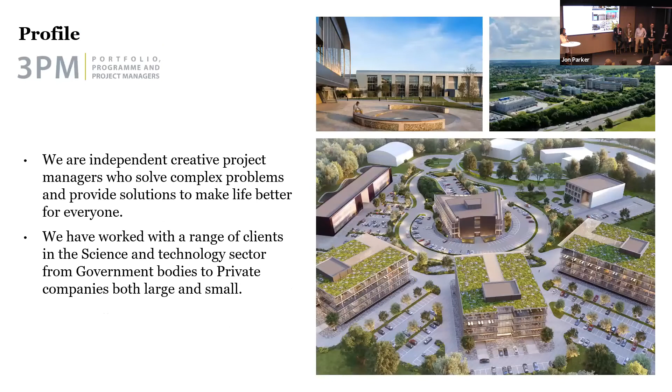Ramboll are 16,000 people across the globe, covering all sectors, but they have specialisms in the UK in science and commercial spaces, and are the go-to structural, vibration and acoustic engineers in this sector. An example of where the research paper's findings are being put into effect is Cambridge Biomedical Campus and Granta Park with Biomed Realty, who we're fortunate to hear from later.

How am I doing with your companies? Turner & Townsend are 75 years old this year and deliver a variety of services across the breadth of the real estate sector. They are leaders in the science sector, having delivered major projects such as the Francis Crick Institute in London, and have a deep understanding of the science sector built up over many years.

Good. Right, I'm going to hand over to Rob to talk about our research paper. Thank you, Susanna. I have some notes here, so forgive me. Just let me check I get the message across properly.

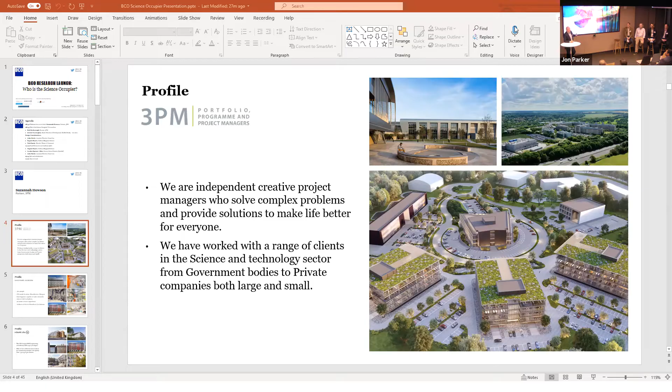So, introduction. I'm going to do the scene setting for today, and the guys who are the experts are going to talk about the specific disciplines that they relate to.

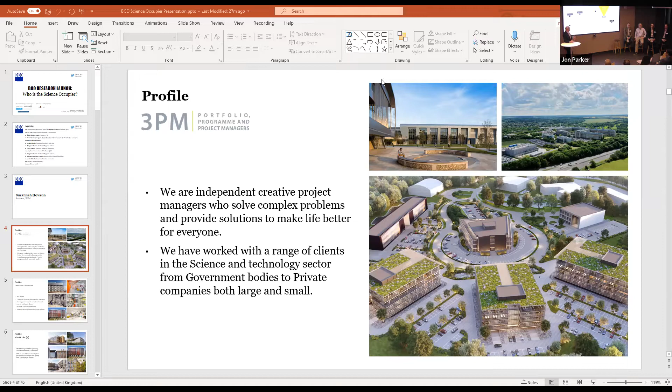But we are ideally placed because of the knowledge that transfers across from the US. There are more biotechs and startups in San Francisco, Cambridge Massachusetts, and Boston, and all the way down the East Coast. A lot of that learning is coming across into the UK, and how they launch their companies on the NASDAQ, and how investment is attracted, and how they understand the companies we are trying to attract as developers, investors, and for occupiers.

And then obviously, because the UK is centred around the Greenwich Meridian, it's perfect for time zones as well, to reach both east and west. So it ticks a number of boxes for the global science community.

So it's important that we have these hubs for scaling great ideas, nurturing top talent, and building a dense pool of expertise that's sustainable. And that all leads to building a community that's perfect for occupiers in the UK.

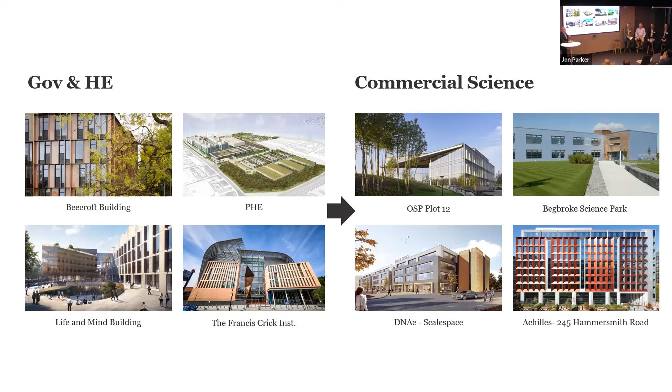Where we're now going is bespoke commercial science. Places like Oxford Science Park, Begbroke, Achilles Arena, 245 Hammersmith, some great buildings there, and those are symptomatic of what we'll all be working on going forward. So we have some great talent, and that's kind of where we're heading.

Yeah, we're going to do a double act. Yeah.

So we're just going to talk a bit about design considerations and things that the tenants may require, and how it could fit into any existing building or new building.

So I think first of all, it's probably good to take a step back and just look at what the specification level that the tenant would require could be. There are three main drivers really that could influence this.

First of all, the typology of science. Rob articulated there are many different typologies, medtech, cell and gene therapy, etc. They all have different needs, and depending on the location, where they are in the city. For example, if you're in a city centre, it's more likely to be an incubator next to a higher education facility that they lean on.

And then also we need to look at what the maturity of said occupier would be. So if you're a spin-out, you're likely to be looking at higher specification of the laboratory in terms of the fit-out, so you'd have almost a fully functioning lab at day one. And then if you're more of a scale-up, so you've secured additional funding, that would lend itself more to a shell and core kind of approach to fit-out, because they're much more bespoke in their requirements.

So that's really picking up on what Orestes was saying in the video, in case you didn't catch it, is that the drivers for innovation, the collaboration between organisations, is absolutely critical. So building that into your property is really important.

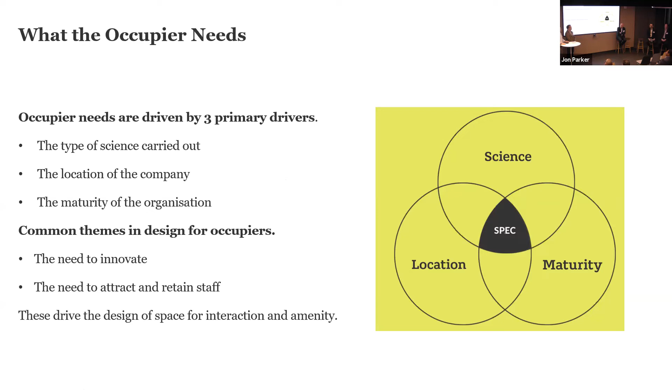And then generally, there's a whole range of different types of science. We won't list them, but obviously there's going to be office write-up, lighter CL2 wet lab, biology typically, so not too many fume cupboards or MSCs. And then you've got a higher level which would be more chemistry-based tenants or occupiers where you have higher intensity, maybe higher air change rates and higher density of equipment. And then at the end there's advanced manufacturing, which is further along the spectrum of their development.

In the first slide, we picked up on some of the key themes that we're meeting in designing buildings for science users. And another, apart from interaction and the drive for innovation, another common theme is flexibility and adaptability. I think it's almost ubiquitous.

If you're talking about science buildings, people talk about how you're going to flex the building. And there are three drivers that we've picked out on the slide. But the reality is that the companies we're providing for—Rob and Jon have both talked about spin out and scale up.

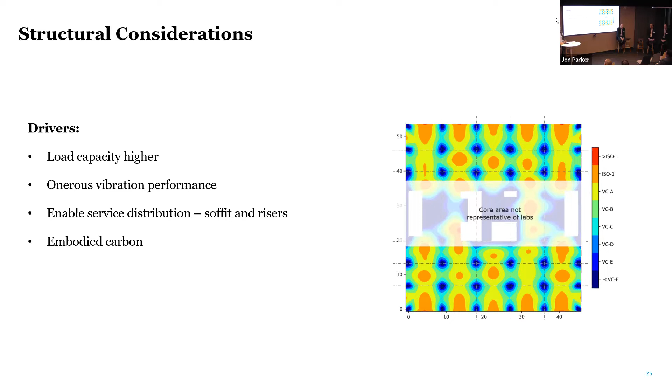So as a follow-up from that, having talked about the structural frame and the space planning grid, the other conversation we often have at the beginning of design for a science building is what's the right floor to floor height, and the driver for that is usually the M&E, because they want to distribute air across the ceiling, what was the ceiling void, or is the ceiling void.

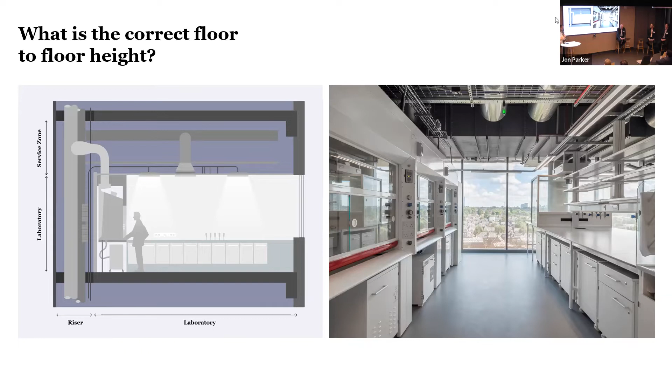Next slide. So having talked about air, I'm going to pass to Jon.

Thanks, Eugene. So as part of the M&E, there are additional air change rates required within labs in comparison to offices. This is an example of 245 Hammersmith Road, where designed as an office, BCO office, laboratory went into the space. In order to make the labs work, we actually placed on-floor air handling units within the floor plate, and this negated any need for air handling units to go on the roof where space was at a premium.

What it meant as well was that the occupier had full autonomy over their plant, so they didn't have to traipse up to the roof, and actually it worked quite well. We had to add additional louvers to get the additional air onto the facade, but yeah, it's quite a simple solution to meeting the needs of the occupier.

If you're talking about a new build, then the additional air change rates would obviously be built into the air handling units and distribution ductwork. It's worth just saying that for a laboratory, typically you're talking about 6 air changes an hour as a minimum, and that obviously can grow compared to how many for an office.

Well, I think in commercial science we're trying to challenge the norm. Traditionally, I think HE and government air change rates were quite high compared to what they are now. So to get that real efficiency and value for money for our landlords and occupiers, by driving that down, it also helps with the operational carbon as well. So we're looking at more 3 to 6, depending on the typology of science.

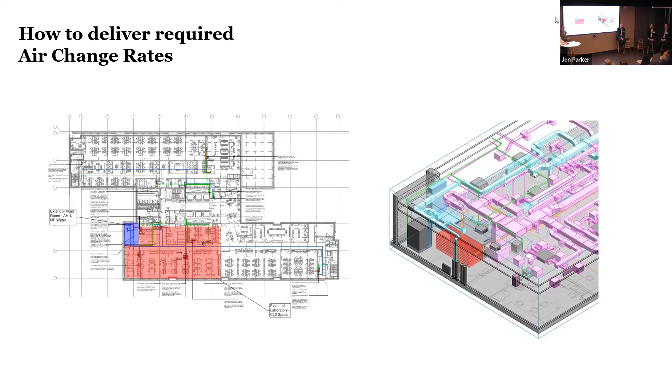For example, at 245 Hammersmith Road, it would have been very challenging given the environment and the turbulent airflow around that Hammersmith roundabout to actually put a flue up there. So we got to grips with the users, got a list of chemicals, and looked at whether we could put in recirculating fume cupboards, which negate the need for any flues, and we proved that it could work, and as such it was a much simpler installation, didn't have to go through planning, etc. So although flues can look scary, there are ways around it, basically.

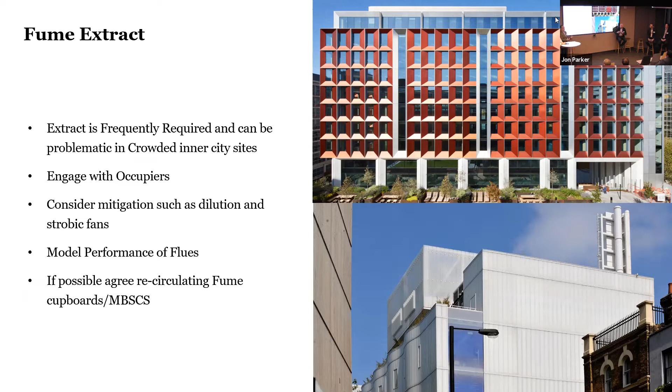We're trying to make things simple, I think, is the message here. Then there's obviously a requirement in labs for back of house, so handling of consumables, solids and solvents and acids, gases and cryogenics, cryogenics being liquid nitrogen typically used for cell storage on the floor. I don't want to go into too much detail, but liquid nitrogen, if you're transporting it around the building, you need certain health and safety requirements.

There are ways around that as well, by potentially using liquid nitrogen generators, which negate the need for as extensive health and safety requirements. So again, it's a challenge, but it's absolutely not unovercomable. It's one of the key differentiators between a science occupier and a non-science occupier: you do have to provide these spaces, and you have to envisage how they might flex and change as your occupier profile changes.

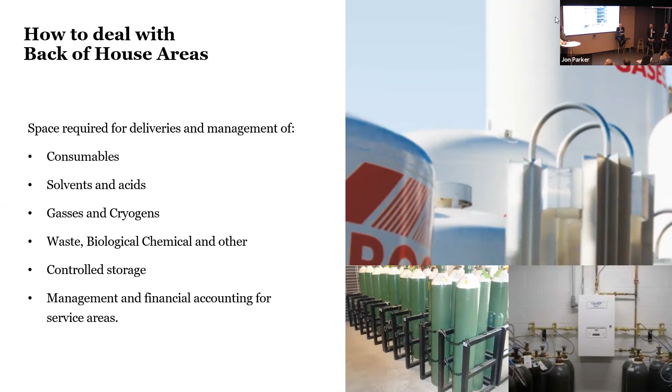So another key aspect is what the landlord-occupier split should be, and this is right for fit out or new build. As we alluded to earlier, the maturity of the tenant could dictate what your day one specification of the laboratory would be. This depicts more of a scale-up, more mature tenant where you'd probably, in theory, go with more of a shell and core type approach because they've got more specific requirements in the lab and probably the funding as well.

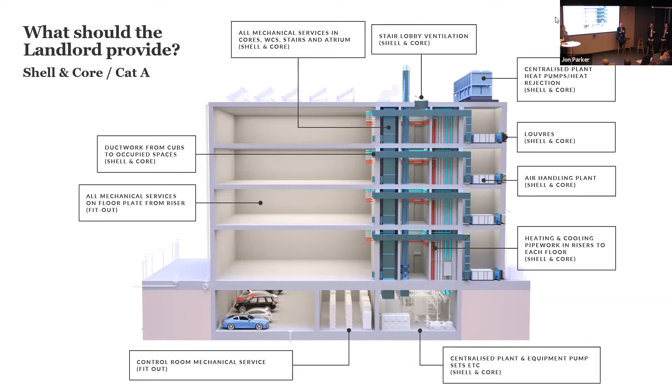That they can do the fit out themselves, rather than if you're an incubator spin-out type occupier, you'd require something a bit more fitted out, oven ready, so that you can go in and start exacting your science. It's worth saying we've already written Cat A at the top, and thanks to the BCO, those concepts are kind of well understood. In the laboratory world, that doesn't really exist, so it's still something that's negotiated very much on an individual basis, something that needs to be considered and discussed.

In terms of net zero carbon sustainability, it's increasingly and extremely important for both occupiers and their funders, with particular requirements. Laboratories are much more energy intensive, and there are health and safety considerations in terms of air change rates, etc.

But what we would say is there's huge opportunity here to make big gains. Demand-led ventilation, if you implement some of these, can actually get quite big operational savings. Then obviously smart sockets, lower light levels, control capacity. I think really it goes down to that initial briefing with the occupier. You can challenge them against the norm of what they may have done before, and you can drive down that operational carbon.

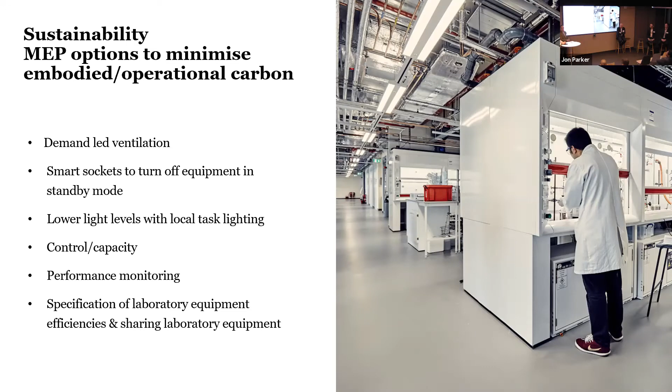We're going to touch on two project examples which illustrate some of the things we've said. This is a project on the Cambridge Biomedical Campus, which we didn't work on - it's a building designed by NBBJ architects with Ramboll and Hoare Lea as structural engineers and services engineers. What makes it interesting is it's a building where they've separated out the offices and the laboratories. It's a single occupier, commercially rented space, but because they had the occupier there at the beginning and taking the whole building, they were able to pull those two bits of brief apart. And it illustrates really clearly the difference between an office building and a laboratory building.

You can see on the left the green block, which is planned to a 6.6 metre grid. It has a much greater floor-to-floor height, 4.5 metres. Then on the right the blue block, which is all the office accommodation, planned on a 1.5 metre module, so 7.5 metre structural grid, with a lower floor-to-floor height. They both have rooftop plants, and there's a little bit of extra flexibility for laboratory, but broadly speaking that difference between office and laboratory is set in stone, inverted commas, in the building.

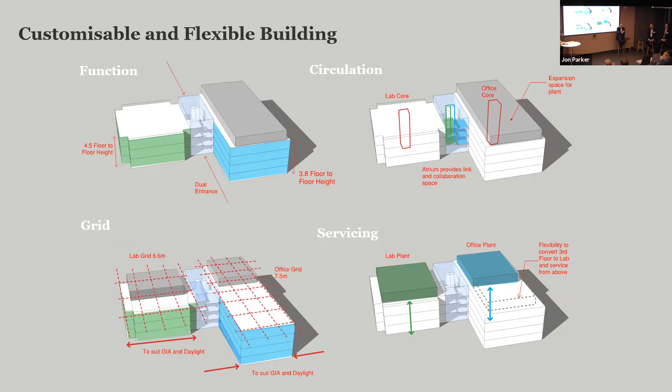By splitting those two, the advantage is that by splitting the labs from the offices, you reduce the high energy, high structural cost laboratory space to only the minimum necessary. You can build a much lighter weight office building next door to it. I suppose the disadvantage might be in the future that your lab space is capped effectively, so you can't have the lab migrate into the office. So you've really put a limit on your future lab space.

And of course you have to deal with those differential floor-to-floor heights, so you might have to have double-sided lifts and perhaps extra circulation, but it makes for a really attractive kind of building as an architect. It's the kind of thing we really enjoy.

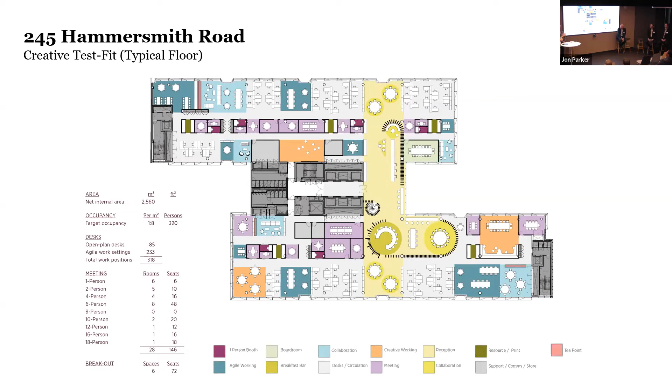So if we zip through the next few slides, this is really just to show we planned it out as an office, with your classic open plan desk seatings and a variety of work settings for what we envisage will be a media company. And if we go to the next plan, this is how, as a sort of shell and core architect, we dealt with the possibility of labs.

So the things that really helped were having a goods lift that could be accessed separately, having a circulation route that allowed for service access to the laboratory spaces from the back that didn't go through your front of house. So segregated circulation is really, really important and desirable. And of course having space that we could carve out for M&E. So the facade, having demountable panels that we could demount and add louvers in, which meant we could create on-floor plant, so we didn't have to drive risers up to the 10th floor. So there's a few things that we did in there that you could reproduce.

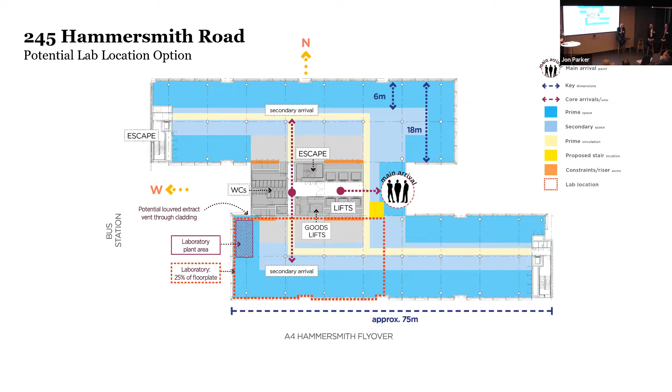So we learned quite a lot through this exercise. And then if we hand over to Nick.

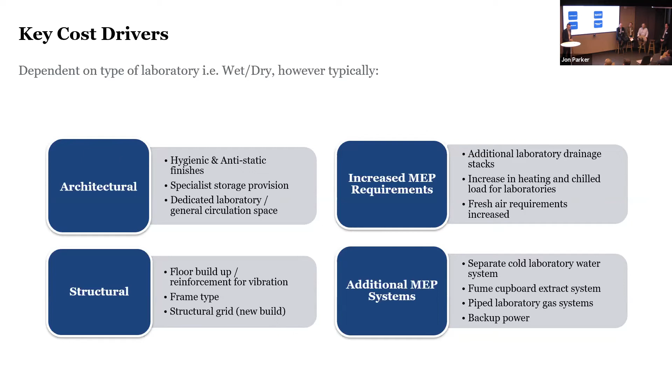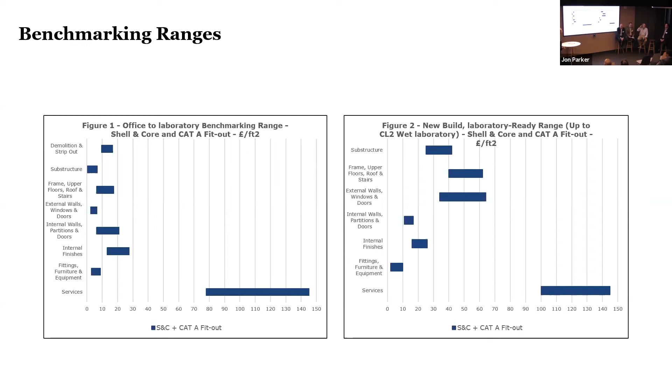So this is one of the cost models included in the research. It's the refurbishment up to sort of CL2 wet lab. So there's quite a heavy intervention here in terms of the existing building and what this model includes. It's got structural modifications to support the building, full strip out of the plant and services and replacement, and hygienic finishes throughout as well.

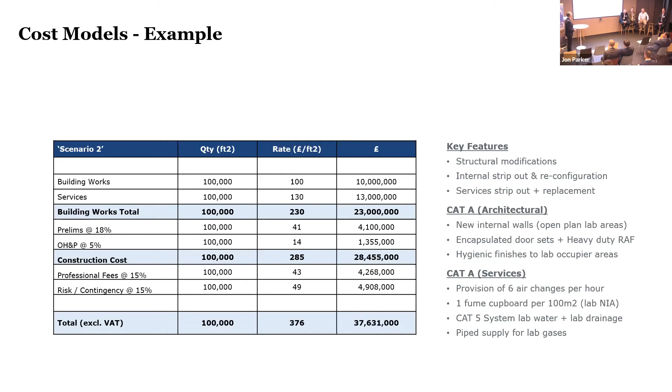So there's two other scenarios in the report. One is another refurbishment with a lighter touch intervention, and one is for a new build, so please do look at those. If we can skip on, please. Oh, there's the scenario that it is.

And then just to sum up, really, if one of your clients or developers is looking at the buildings in their portfolio, how might you look at those and understand whether they will work to be fit for lab use or be appropriate for science occupiers. So structural grid we've talked about. Look at the structural grid, understand what those buildings currently have, and then think about that trade-off between what labs require and the typical 1.5 metre grid.

Suitability of frame, reinforced concrete, look at that. Slab to slab heights, we've touched on this, so 3.7 minimum, really, up to sort of a preferred of 4.2. It can even be higher potentially.

Riser space, I haven't really touched on that yet, but riser space will increase because of the requirements for infrastructure running up the building to support the lab spaces, whether that be piped gases or extra ventilation needs. So riser space is key. If you've got buildings with bigger riser capacity, or spare riser capacity, then they might be good options to look at.

Logistics and back of house. Science occupiers need that space. They need back of house areas. They need storage more so than a typical office.